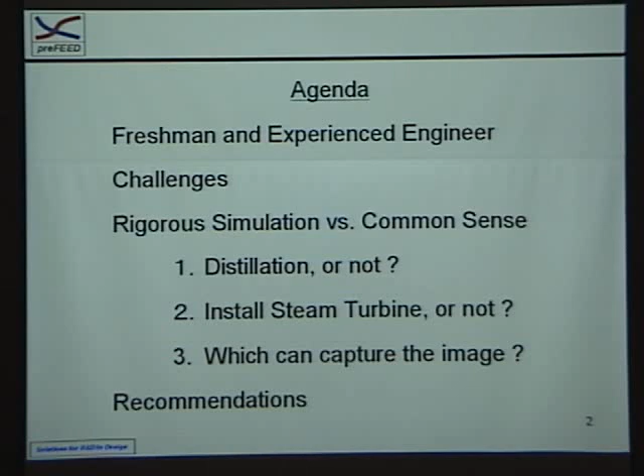The first topic is what's the difference between a freshman engineer versus an experienced engineer. If I have the question about what's the size of a pipe for 100 cubic meters an hour of water, so we have a flow of 100 cubic meters an hour, and we have to size the pipe. Here we have the junior engineer, and if the velocity inside the pipe is 10 meters a second, then the size should be 59 millimeters as a diameter. And we can calculate. Or if the velocity is 100 meters a second, then 19 millimeters.

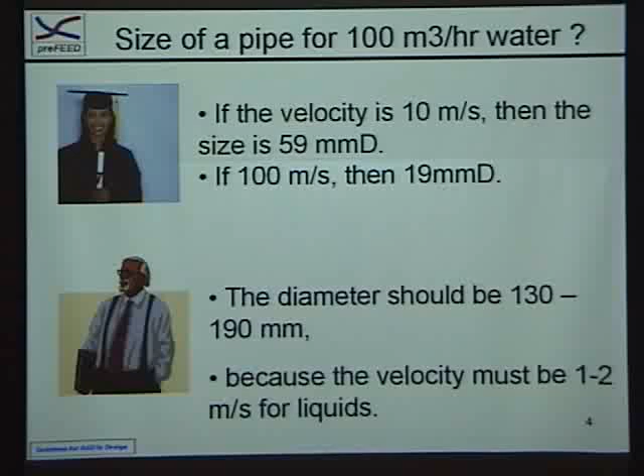It's very simple. Here we have experienced engineers, and he said the diameter should be 130 to 190 millimeters. So he's very specific. Why? Because he knows the velocity must be 1 to 2 meters a second for liquid inside a pipe.

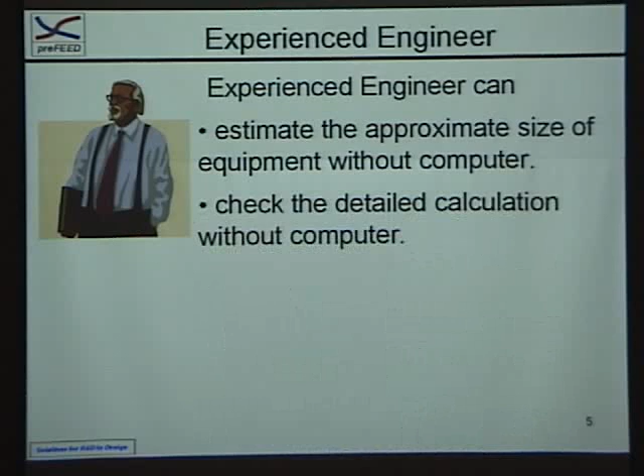The feature of an experienced engineer: he can estimate the approximate size of equipment without a computer. He can check the detailed calculation without computers. An experienced engineer has the knowledge of standard values, first questions to ask, quick calculations, or the meaning of parameter values. So in a sense, we can say that the experienced engineer has common sense of process design. And this is the topic I would like to cover during my presentation today.

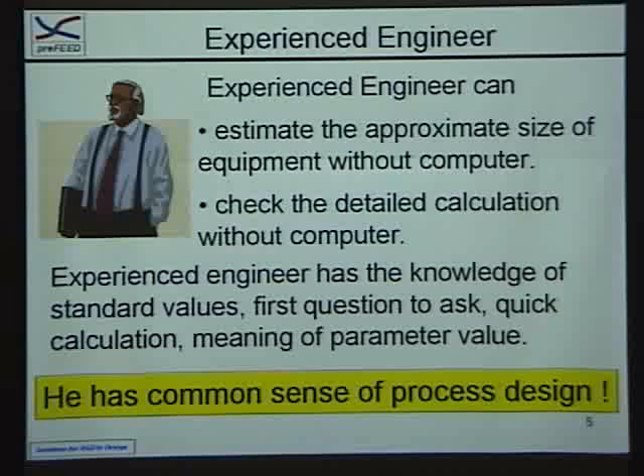Let's talk about the challenges. If we have enough experienced engineers in our company, we have no worry about our future. What's the situation? This was taken from the statistics of the Japanese government, so unfortunately I don't have the Korean figures. This is a trend of the population from 0 to 14 years of age. Back in 1980, Japan had almost 25 million people. But we have a trend of reduction, and in 2020, 20 years from now, we will have a shortage of potential engineers.

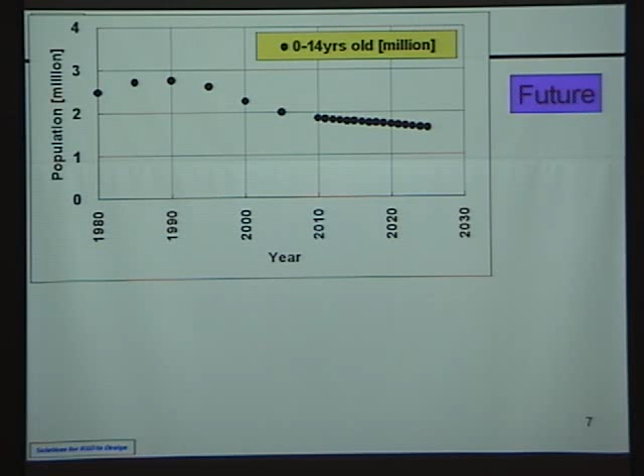So the situation is that human resources will be reduced further. This is one of the biggest challenges we have in Japanese industry. Maybe you have a similar situation here.

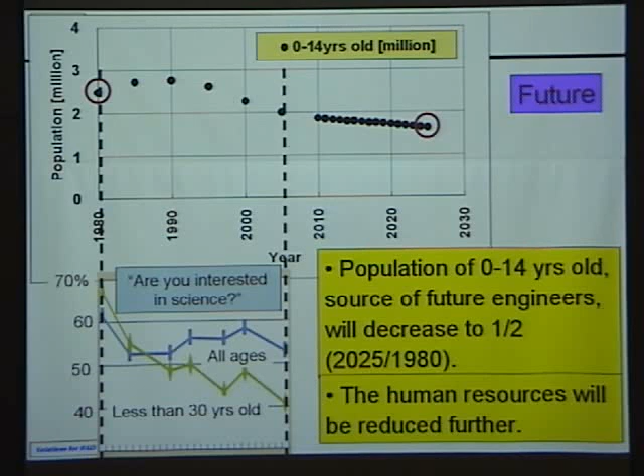On the other hand, let's talk about the concrete expectations of you. I don't know how many of you in this room are from industry and how many are students. But how many years will your boss be patient for you to accumulate experience? Dr. Ogawa mentioned the importance of accumulating technology, but it takes time. How many years do you think your boss will allow when you join the company? The typical answer by a Japanese manager is 5 years. Or if the manager is aggressive, he would say 3 years. So the typical company expects us to develop our own expertise within 5 years after joining.

Compared to that expectation, I would like to talk about the situation of today's engineers in Japan, maybe applicable here. I am conducting questionnaires regarding process design, consisting of 100 common sense questions. I started these activities approximately 6 months ago, and I have surveyed more than 50 engineers from top-class chemical companies in Japan. The answers were categorized into 3 areas: I know well, I'm not sure, I've never heard of it.

This question was not the most difficult one. What about this one? Meaning of parameter B of Antoine equation. In the morning I explained the application of the Antoine equation for vapor pressure. For the Antoine equation we usually have 3 parameters, A, B, and C. The question was, do you know the meaning of the parameter B of the Antoine equation? And then suddenly the success rate of the answer dropped to less than 1/4. And many people are uncertain about their knowledge.

The next typical question is, I hope you know relative volatility. If the relative volatility is 2, do you think it's a difficult separation or not? This is actually a very important question to understand. Maybe you can skip these 2 questions, but if you work in the process industry, you cannot escape from this type of question. We have to make a judgment if this separation is easy or difficult, surveying the physical properties. So this is a very important question, but unfortunately, only a handful of people say that we know that.

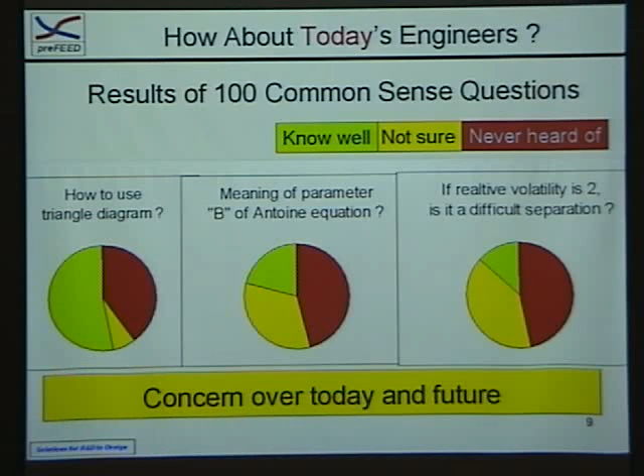Most of the people asked about this question said, well, I'm not sure, I have never heard of this. But this is the reality of today's engineers in Japan. So we have not only concern over the future but also over today. That's the situation. So for today's challenges and needs for training, there's a huge gap between expectation and reality. That's what we are facing today. And we also have the concern over the future of human resources, as we saw about the trend of the population.

So these are the reasons why we need to train our engineers. Coincidentally, Dr. Ogawa also emphasized that it's very important for us to train engineers, which is true not only for process control, but also process design as well. We have to train engineers so that, one, they can make the best use of a process simulator if we can use one. And they should be able to design processes without a simulator if we cannot use one. There are many processes these days for which we cannot use a process simulator. And as long as we are engineers, we have to come up with the right design, with or without a process simulator. So for these two reasons, we have to pay a lot of attention to training engineers.

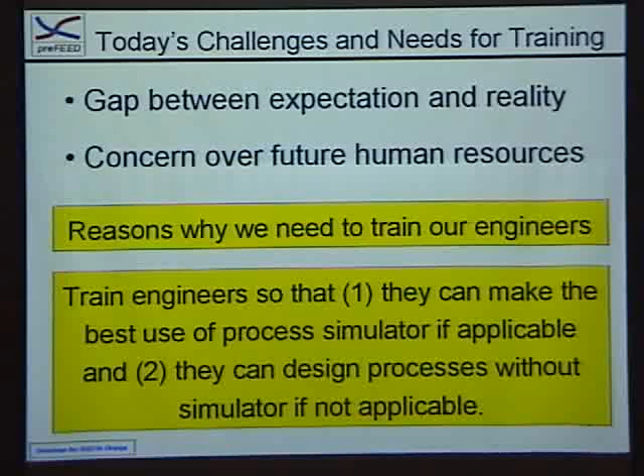Now I would like to give 3 examples about rigorous simulation versus common sense. I'm not saying that rigorous simulation is not necessary. On the contrary, I strongly believe that we have to use process simulators for better design. But in order for us to have the right design, we also have to have common sense. And we would like to see this slide now.

Before getting into the examples, this is a brief description of the terminology. Many design options are theoretically feasible, but only a small number of designs have survived and been implemented as a real plant. There are technical and/or economic reasons why we select the design. The knowledge related to them is accumulated in each experienced engineer after a long trial and error effort. This knowledge is called rule of thumb, heuristics, back of the envelope calculation, or common sense of process design, which are all related to conceptual process design. So we are talking about conceptual process design. For the detailed calculation, we definitely need process simulation. But if we talk about conceptual process design, what should we do? That's the topic we are focusing on.

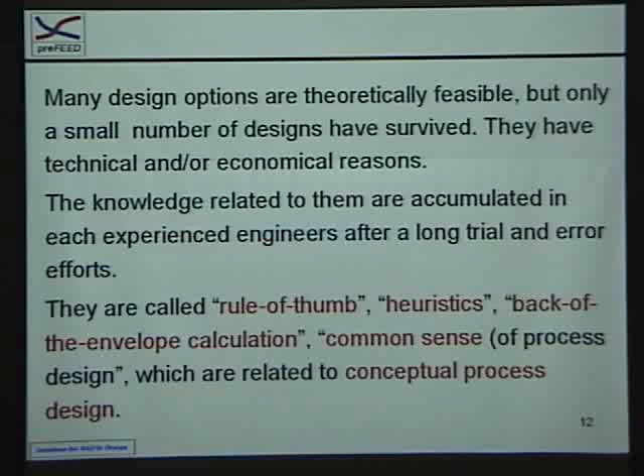The first example is a distillation warm-up. We have a dialogue between the engineer and the manager. The problem is the separation of ortho- and para-dichlorobenzene. These two compounds have boiling points at 180 and 174 degrees. So the boiling point difference is only 6 degrees. Please imagine how difficult it is. The engineer said, well, I used Aspen Plus to calculate the distillation column. It looks like the separation is not easy. Should I continue the case study, or do you have some suggestion? So he comes to you and asks this question.

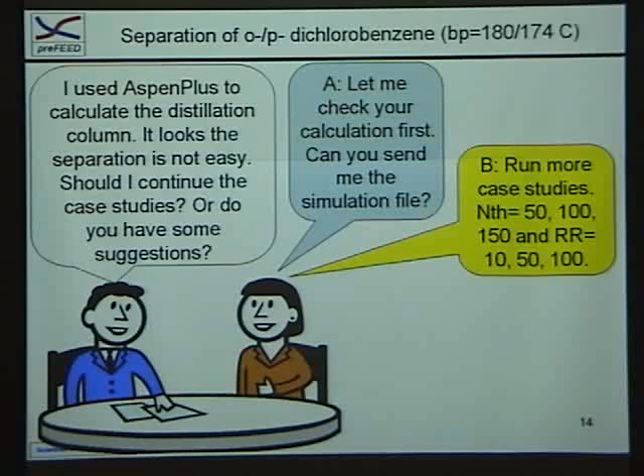Possible answer A. If you are very technical, probably this would be your answer: let me check your calculation first. Can you send me the simulation file, please? Alternative answer: run more case studies, with theoretical stages 50, 100, 150, and reflux ratio 10, 50, and 100. Sometimes we have this answer: the boiling point difference is only 6 degrees C. Distillation is not practical. Do research on other separations. So these are 3 possible answers.

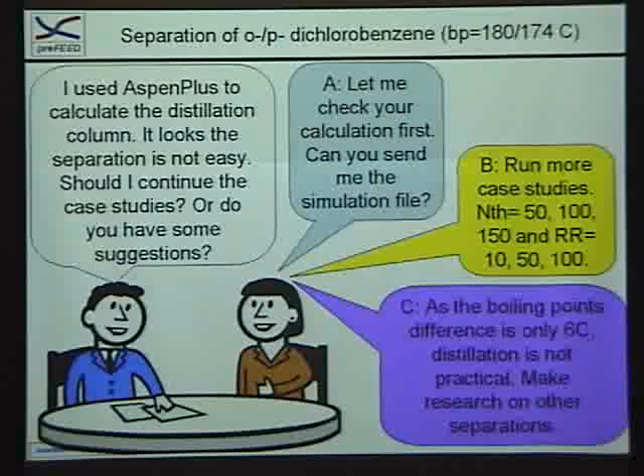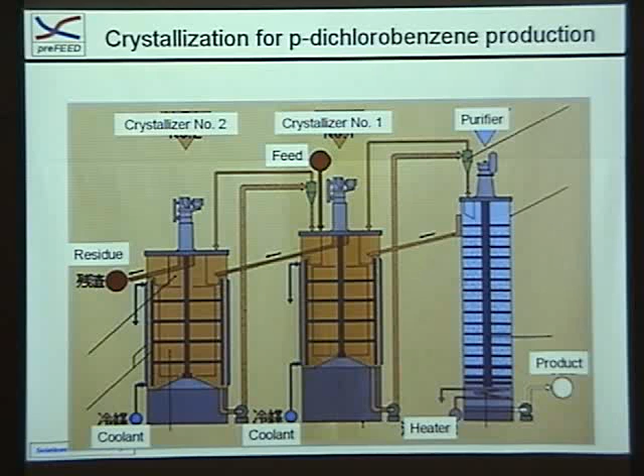Actually, ortho- and para-dichlorobenzene production is usually carried out using crystallization. Some of you may know this. Actually, no distillation was employed for this process. Then why is 6 degrees difficult for distillation? Why?

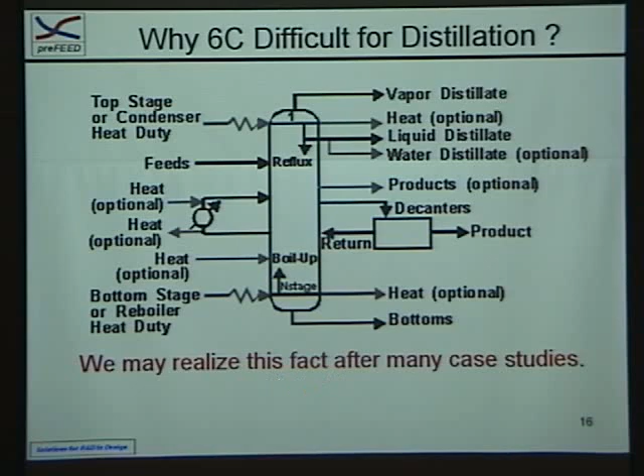Of course, we could come to this conclusion after many trials using the regular simulator. But there is another way. This equation is very simple.

Number of stages, actual number of the stages of the column, equals 1,350 divided by difference of boiling point. It's very easy. So if the temperature difference is 10 degrees, then 135. Can be 135, maybe 100. But the point is, if you know this equation, it's very quick to calculate the difficulty or easiness of the separation. Who found this?

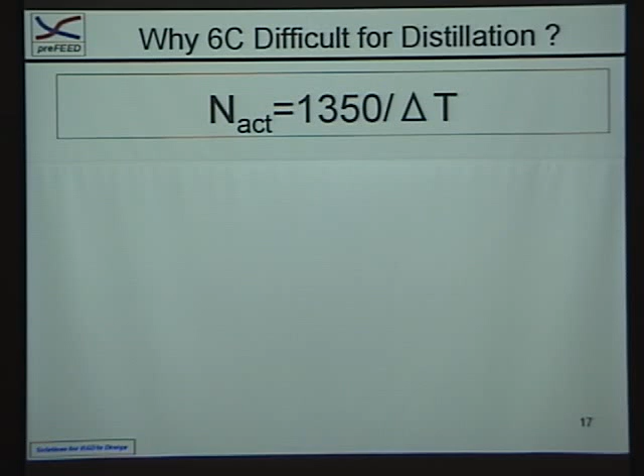Rigorously speaking, we need to understand what are the components and their VLEs, and then theoretically calculate the number of the stages. So rigorously speaking, there's no answer to this problem of 6-degree separation. However, what is interesting is existing columns have common features. That's what Mr. Kawai of Mitsubishi Kasei said back in 1987.

He described molecular chemical engineering for process design, and he used this example. At that time, I was very impressed with this one. And I also checked his equation with the columns I worked on at that time. And I found, of course, this is not rigorous, but if you are interested in conceptual process design, this equation gives me enough confidence.

So if the temperature difference is only 6 degrees, it's not necessary to spend more time on the calculation of distillation. We need to change our calculation and start doing another thing. So, common sense as quick calculation methods from experience.

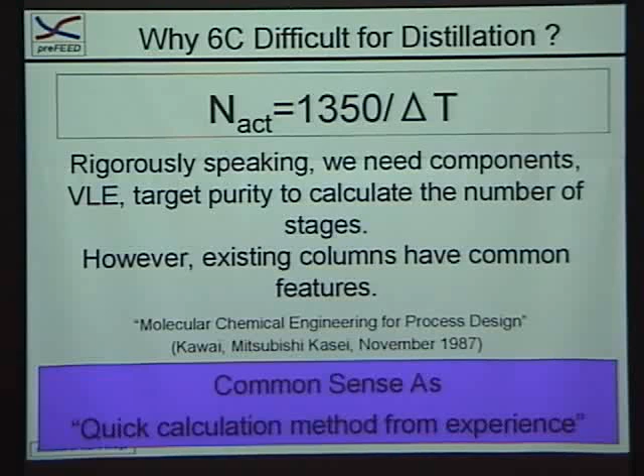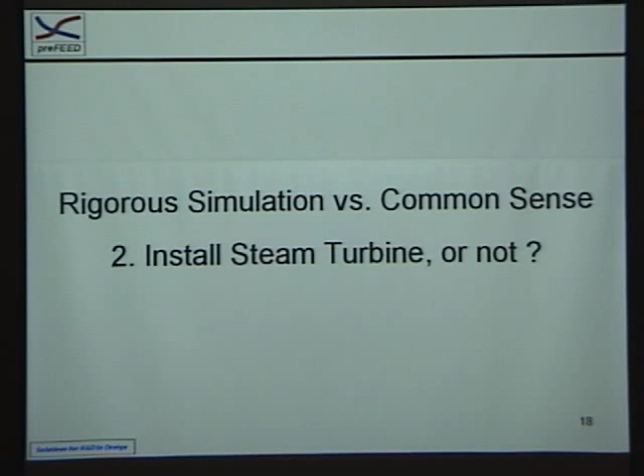Second topic is to install steam turbine or not. Suppose you are thinking of the energy saving of your plant site, and maybe someone asks this question: do you think it's a good idea to install a steam turbine to save energy on my plant site? And here we have a consultant. He will say, maybe. But let me ask this question: do you know the steam demand and electricity demand on your site to answer your question?

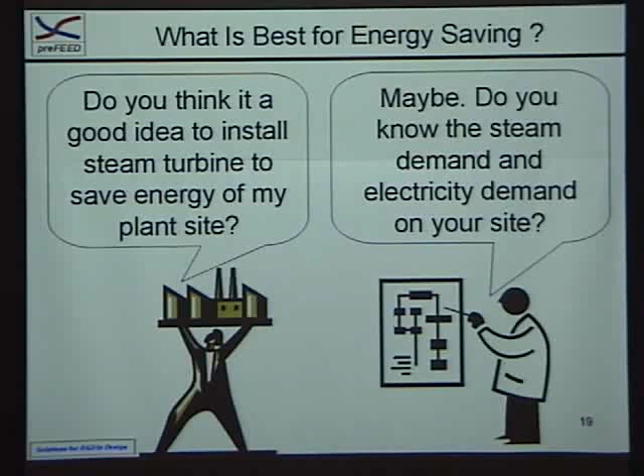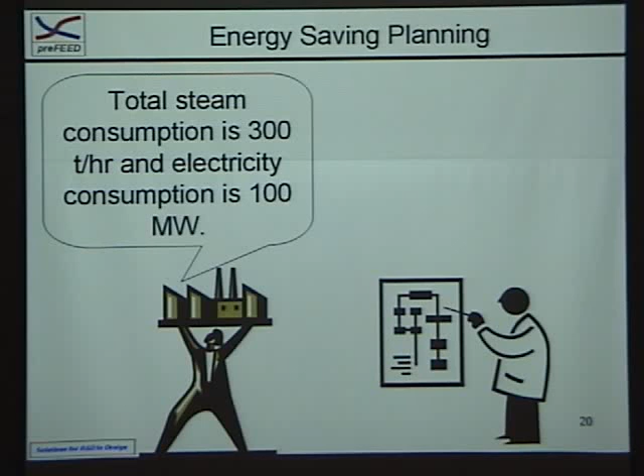So he said that, well, the total steam consumption is 300 tons an hour, and electricity demand is 100 megawatts. Then the consultant would say, my suggestion is that you consider gas turbine first, instead of the steam turbine. You can also study steam turbine combined with gas turbine. Where does this consultant get this information from? Why does he think so?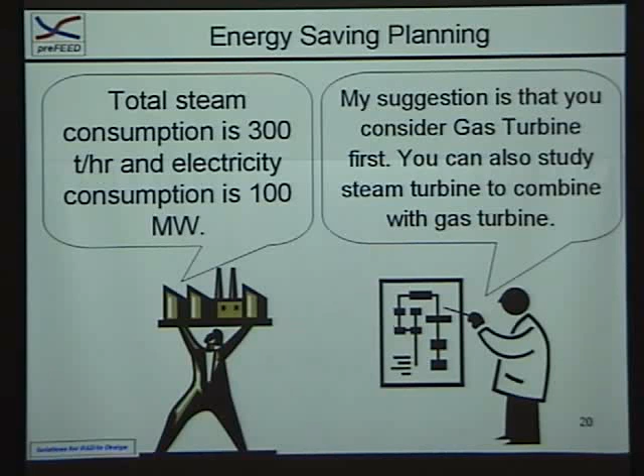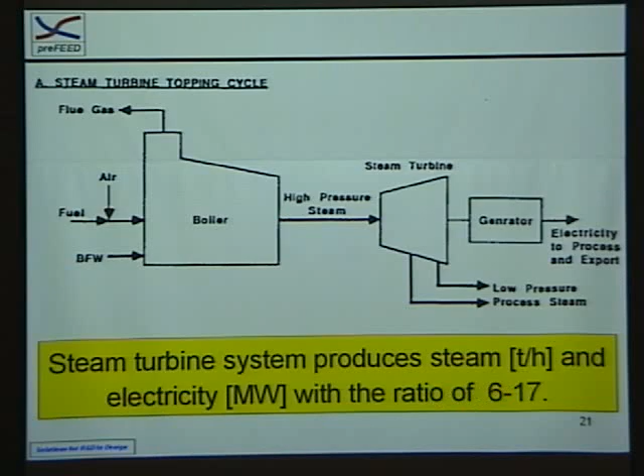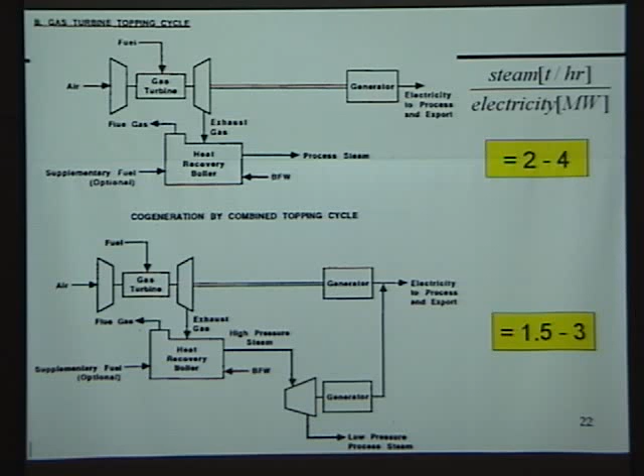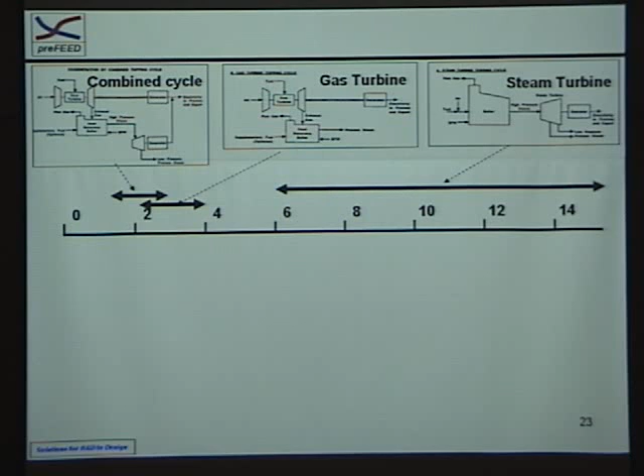So if we plot steam to electricity ratio on this axis, the steam turbine covers a wide range, but relatively higher ratio of steam to electricity. Here we have the different zones for gas turbine and combined cycle. What is interesting is to plot the existing sites on this diagram. You may also want to do it with your own plant data. This is a survey I made in Japan and found this.

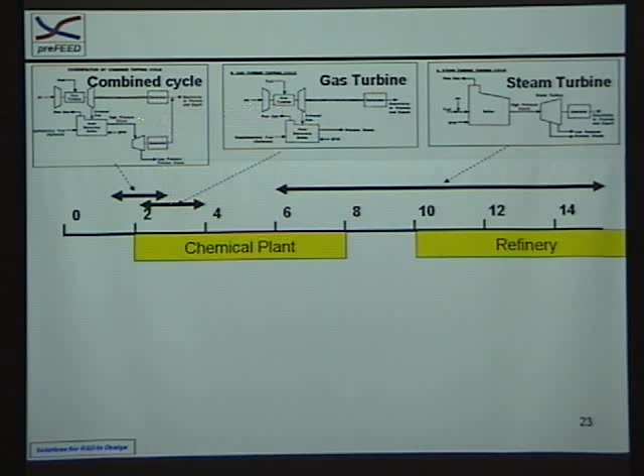So if your chemical plant has a higher ratio of steam to electricity here, then it's quite reasonable to install a steam turbine. But if the ratio is very low, we have to consider these two options. So suppose we have a chemical site around here. So we have to start the energy saving here. So first, if we start the energy saving project, usually steam is easier to reduce than electricity.

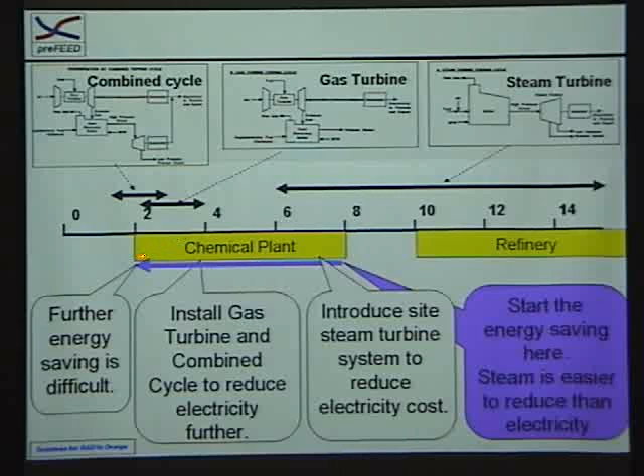So firstly, we introduce a site steam turbine system to reduce electricity cost, which is reasonable because the steam turbine has a fit to this range. If we reduce the energy steam consumption, this ratio will be reduced in this direction. Next, we need to consider installing gas turbine and combined cycle to reduce electricity further. Finally, we reach this point, and with current technology available in the market, unfortunately, this is the limit we have. So if your plant site has this number, maybe energy saving is not the best R&D thing to investigate.

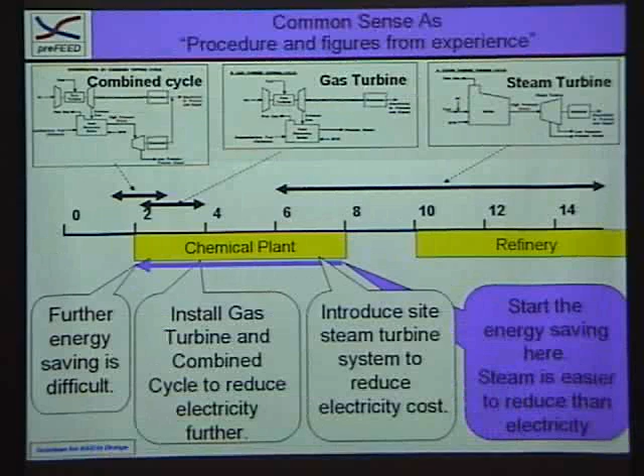So this is common sense as a procedure and figures from experience.

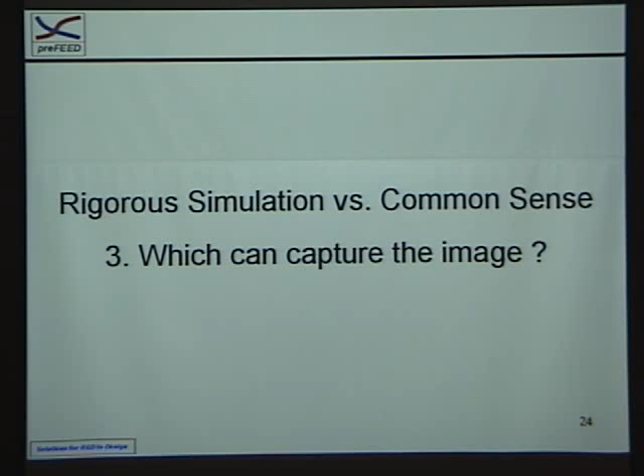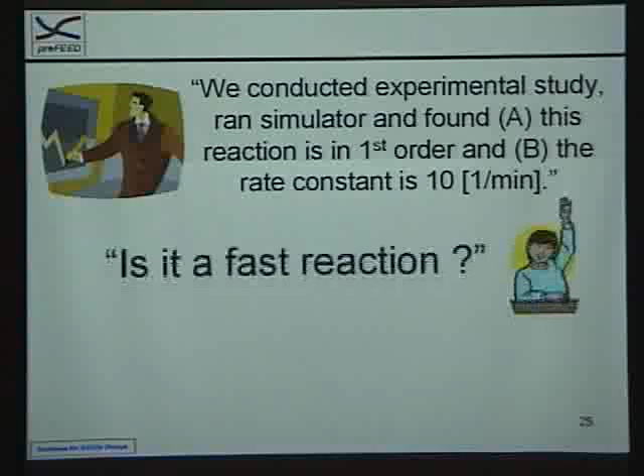The third example is related to capturing the image. A researcher says: we conducted an experimental study with a simulator and found, A, this reaction is first order, and B, the rate constant is 10 inverse of minute. Then there's a question: is it a fast reaction? And he doesn't know. He ran the simulator, and he understands the figure, but he doesn't understand the meaning, or he cannot interpret this figure into his real image of the process.

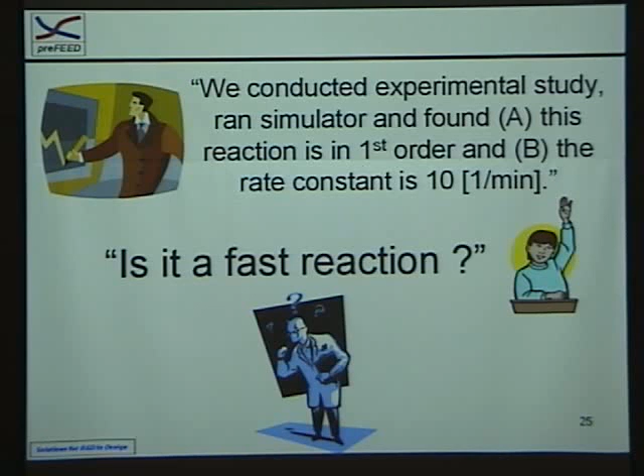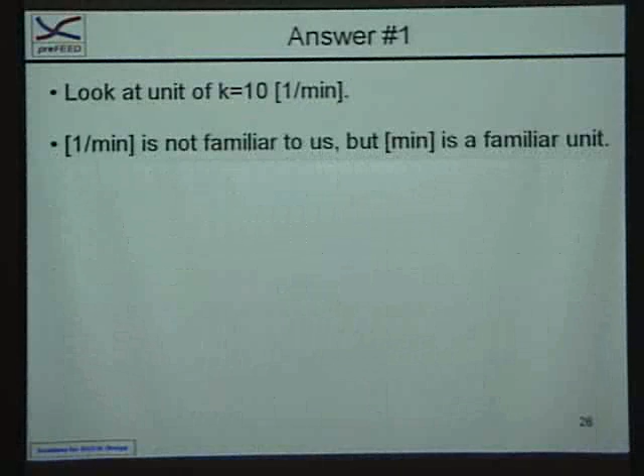Possible answer. All of us learned this at university, so I hope you recall this kind of calculation. First, we learned that the unit is very important, the dimension. So look at the unit of K equals 10 inverse of minute. The inverse of minute is not familiar to me, but minute is a familiar unit, so take the inverse of minute. Then we obtain 0.1 minute. This should mean something related to the rate of the reaction.

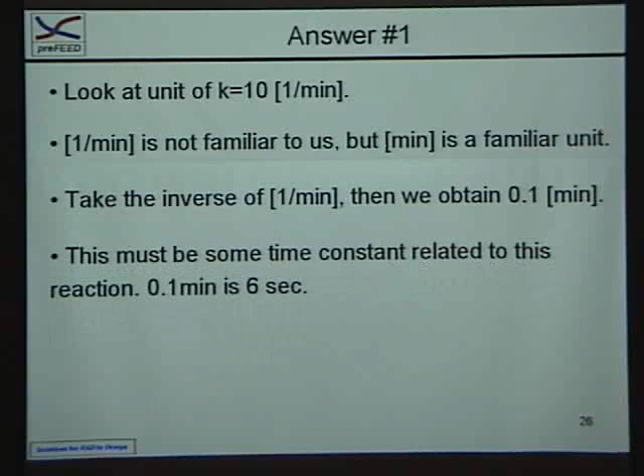So 0.1 minute is 6 seconds, so this sounds like a fast reaction. But of course I should compare it with other time constants, such as residence time of the reactor. If the residence time of the reactor is 1 minute, then I can expect probably all the materials will be converted. So we cannot make a judgment solely by this figure, but we now have much better understanding about this figure.

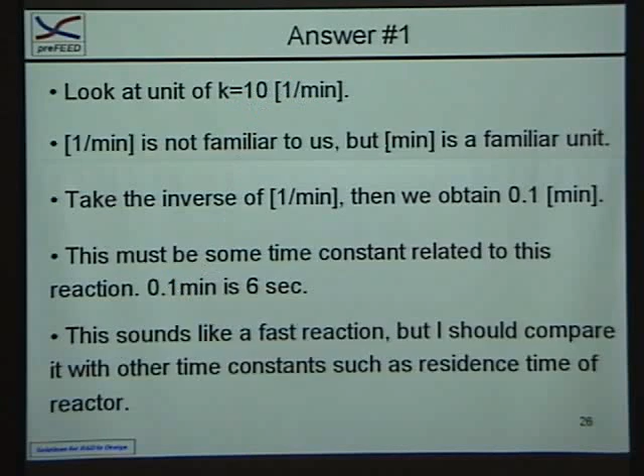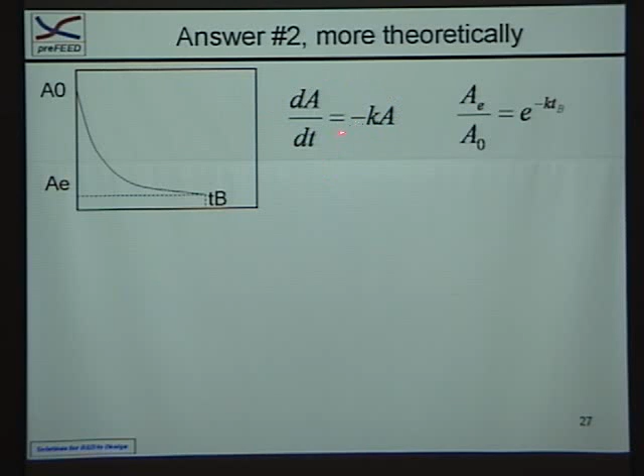A second, more theoretical answer is possible. This is the differential equation of the first order reaction. After resolving this, we obtain this. And we remember that half time is calculated by this formula, ln 2 divided by the rate constant, giving 4.2 seconds. So 4.2 seconds is the half time of this reaction. In 4.2 seconds, 50% of the feedstock will be converted in the process. So it's, in a sense, fast.

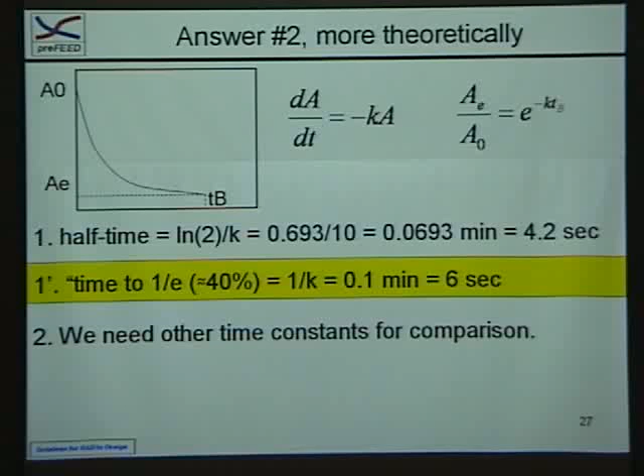I usually calculate this time to E inverse. Do you remember E? 2.718 something. Of course E is not 2.5, but if we assume 2.5, then this is 40%. So I usually just take the inverse, assuming that time to 40% is at 6 seconds. This gives me enough confidence on how to interpret the experimental data. Of course, we need other time constants for comparison, so don't jump to the conclusion that this is just fast, but we now have better understanding.

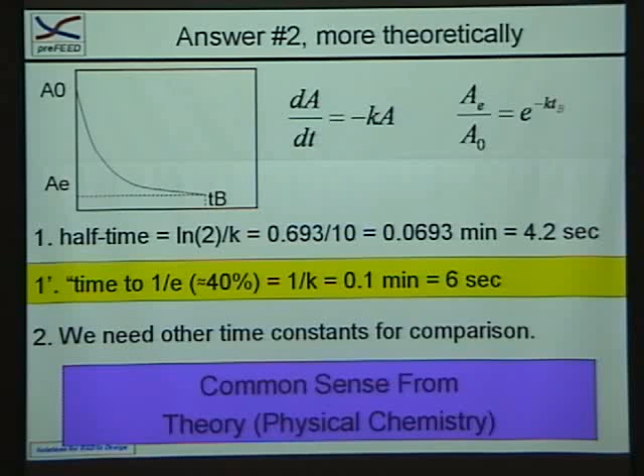So this third one is common sense from theory, physical chemistry. Common sense is mostly related to experience, but not always. If you study chemical engineering or physical chemistry, these basic engineering subjects give us many useful pieces of information about this kind of thing, and we learn some of this knowledge at university.

Finally, the recommendation: common sense, rule of thumb, heuristics, and back-of-the-envelope calculations are critical for correct judgment on complicated calculations. Their sources are not only experience but also physical chemistry. And the third one is very important: they are quite essential to complement process simulation for conceptual process design. As I said, process simulation is very important, but in order to make a correct judgment, it's also very important to have some ideas to make a judgment about the result of the process simulation.

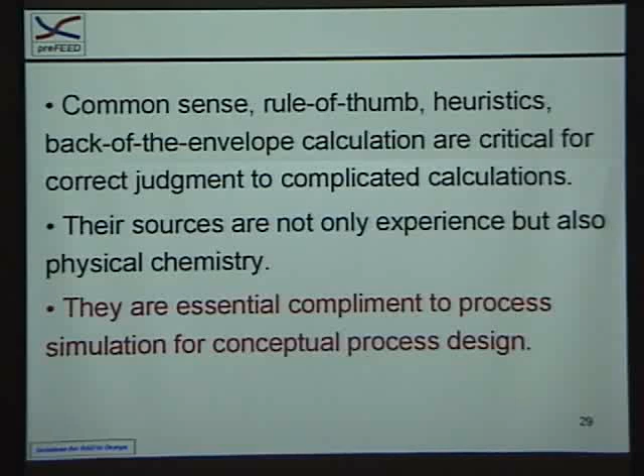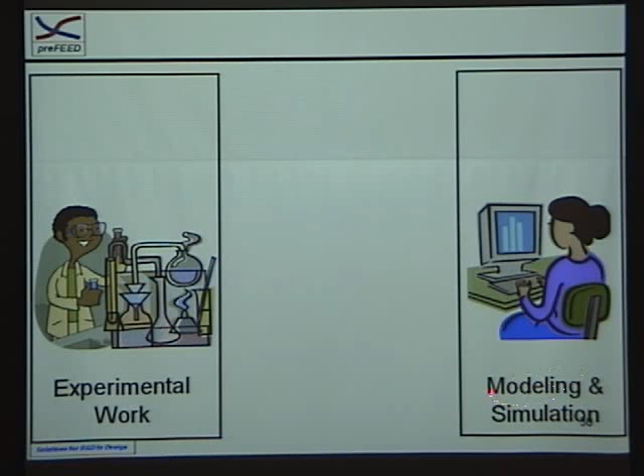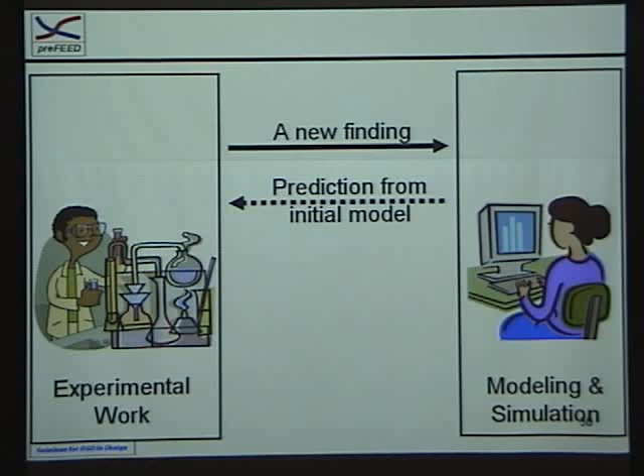So this is what I call rule of thumb or conceptual process design, or common sense. Experimental work is very important, and also modeling and simulation complement this experimental work. We can derive a new finding from the experimental work, and then by working with modeling software or simulation software, we can have a prediction from the initial model. Then we run this experiment again, obtain additional data, and refine the model, so we can continue to improve this model.

But at the same time, it's very important to check the result with rule of thumb. Rule of thumbs are everywhere around us, and we have to pay attention to what rule of thumbs are important to our task.